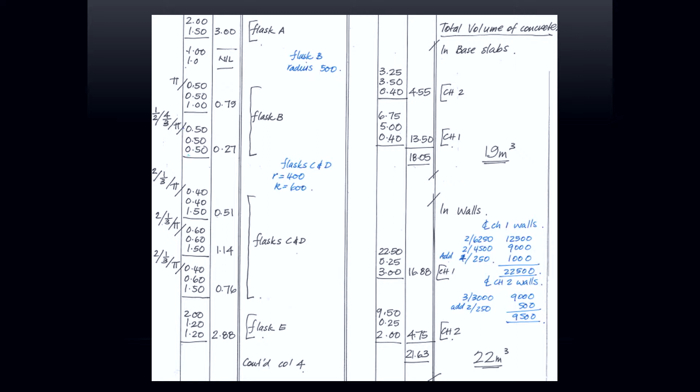The rules that we use for measurement are taught to the students in the first two sessions. So in a weekly program, that's the first 2 weeks. In an intensive program, which our postgraduate students undertake, the first full day of their course is focused on just learning all the rules of measurement. They need to be learned first up so that the rules can then be applied to the actual process of measurement as we go on through the course.

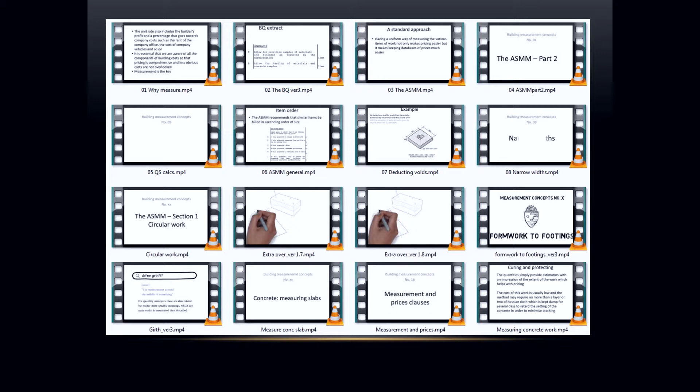So it's a lot for the students to absorb, and if they don't absorb it right up front, they're going to have difficulties with the rest of the course. So what Rick Best had the idea to do was to take all of those particular and peculiar rules and concepts that we need to deal with in building measurement and make each into a small, bite-sized, delicious hunk of measurement, a rule, a concept.

So each concept is then developed into a graphical and animated video. The students can come back and look at those at their leisure, in their own time, for their own revision.

So the process has been, first of all, to prepare a basic set of PowerPoint slides. This is Rick's process, the way he's gone about doing this. He prepares a basic PowerPoint slide with text and voiceover, which will explain one isolated measurement concept. It'll have some basic animations, arrows or zoom in, zoom out sort of things. Just pretty basic PowerPoint presentation though.

He records the voiceover using Camtasia, and initially then it looks like this. Now I know this is going to run for a period of time, so I'm just going to talk ahead of it for a moment. So we'll look at two parts. The first part will be what you see next. Immediately following that will be what it ends up as.

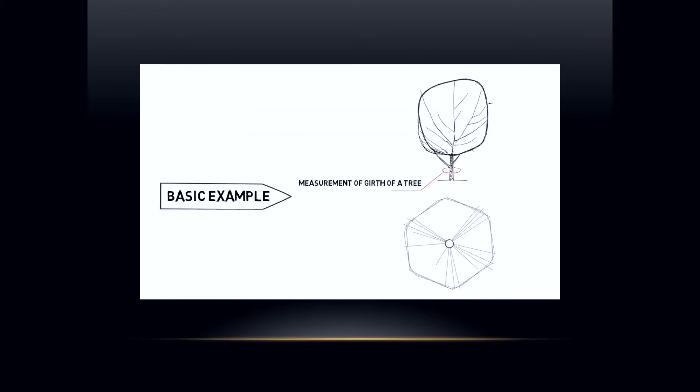Building measurement concepts, number 12. An explanation of the term girth. A basic definition of girth is this: the measurement around the middle of something. But for quantity surveyors and construction people generally, there are also related, but rather more specific meanings of this word. It's easier to show you than try to describe it in words, so let's have a look at some examples. This is a very simple case. The girth of a tree, for instance, is simply the distance around the trunk. And we are required by the standard method to consider the girth of trees that have to be removed from a site, for instance. Trees of a small girth just tend to be included in general site clearance, whereas bigger trees with bigger girths, which require bigger equipment and more time and therefore more cost to remove, are measured according to their girth.

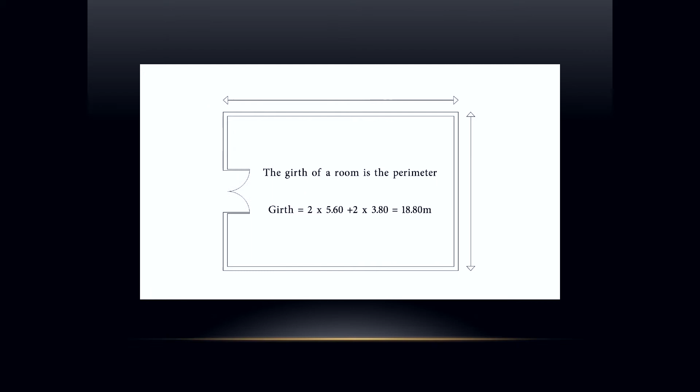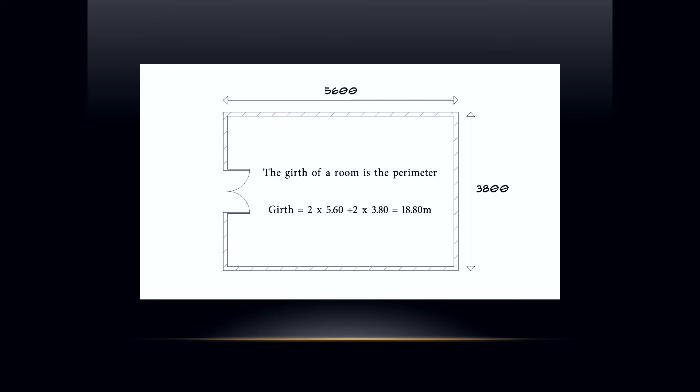And here's another example. The girth of a room is the perimeter, and in this case, pretty easy to calculate. Twice the long side plus twice the short side gives us a girth here, a perimeter of 18.80 metres. But here's another case that's a little bit different. This is a section through a cavity brick wall showing a typical cavity flashing. And what the flashing is there for is to stop water penetrating through the outer skin of brickwork and then into the inner skin, which could then lead to moisture problems inside the building. The way it works is that rain can come in through the brickwork, particularly if there are gaps in the mortar, for instance, and that can happen as mortar ages and gets a little bit crumbly perhaps.

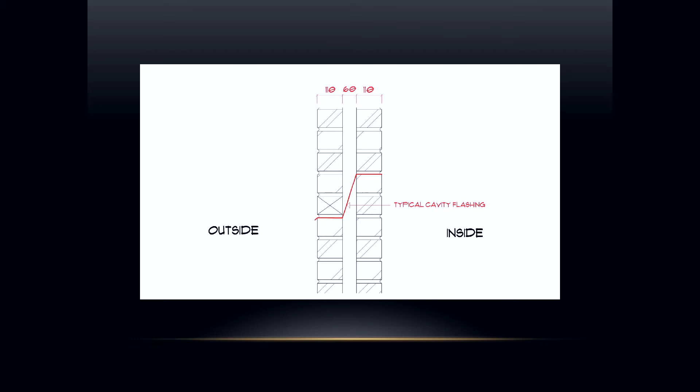Even brickwork itself is not waterproof. Heavy rain with a strong wind behind it can drive rain in through tiny cracks and through the brickwork. Of course, once it gets to the cavity, it runs down the inside face of the outer skin of the wall, until it hits this flashing, which is shaped in such a way that then it leads that water back out through a weep hole.

And a weep hole is shown there as a brick with diagonal lines across it. A weep hole is simply a vertical joint, what's called a perpend, P-E-R-P-E-N-D, and a perpend is left with no mortar in it every so often to create a weep hole to allow the water to escape.

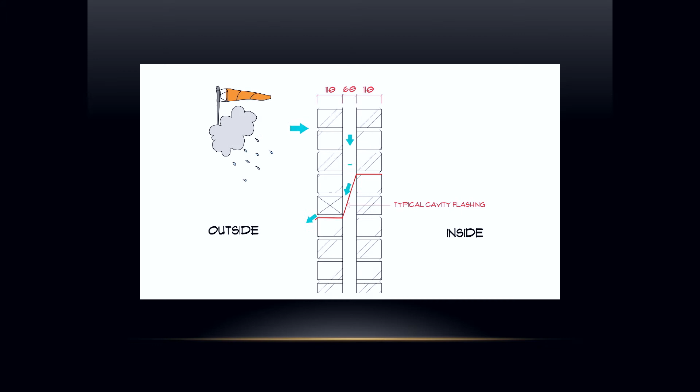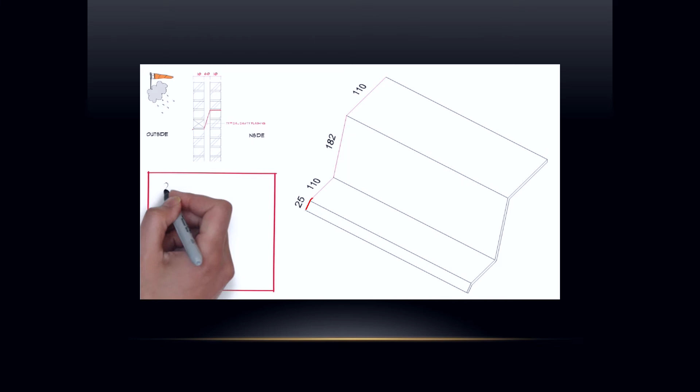So you see that gives us an approximate girth, or width, of 420mm. We call it a girth because once it's been bent into this shape, it will no longer be flat.

Should sign off at that point, but it didn't. All right.

Okay. So you can see, I think quite clearly, that that's a much more engaging little animation of a particularly pertinent topic in the way you measure something within this subject. So generally, benefits for the students: they're easy and specific topics that they can take one at a time or however many they need. The intention is to build into my lecture little icons to say there's a micro-learning topic about this, so the two things will be together.

So they're small bites, as I said, easily digested. They can do it whenever they like. They can take it on their iPad or whatever because they're portable. They're just little MP4 videos. And it's particularly good for ESL students, who generally need a little more time to absorb some of these concepts just because the language is foreign to them, of course.